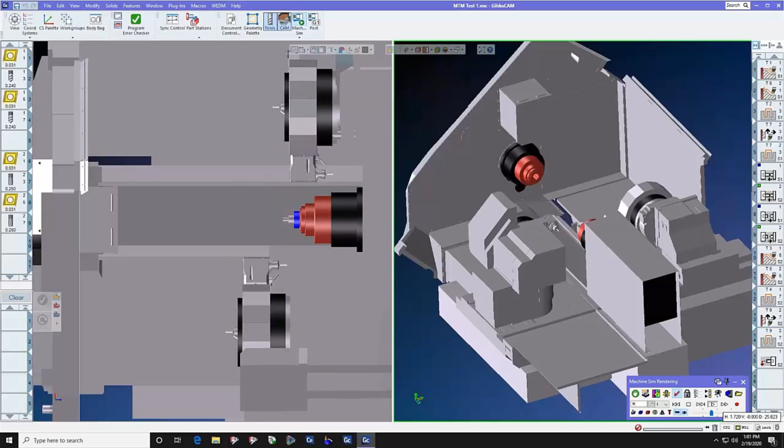Today we're going to be talking about GibbsCAM Multitask Machining, and this webinar is specifically designed to aid shops who are looking for software to program their MTM machines, multitask machines. In the next 30 minutes, we will answer common questions that you may have when starting into MTM, and we will show the ease in which GibbsCAM can set up, program, and even simulate your complete process.

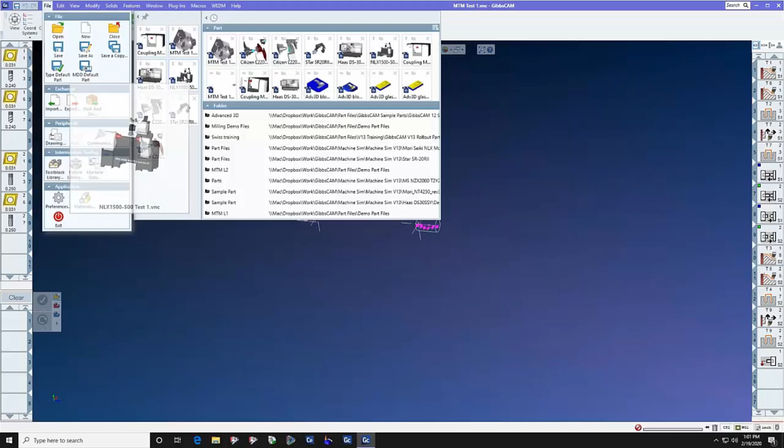As you can see here on the GibbsCAM screen, we have a multi-spindle, multi-turret MTM machine, but we're going to start a little bit further back than that, and we're going to start with MTM level 1. In this 30-minute session, we're going to be talking about the different levels of multitask machining. And here we're going to start with MTM level 1, which is a machine with 2 spindles and 1 turret.

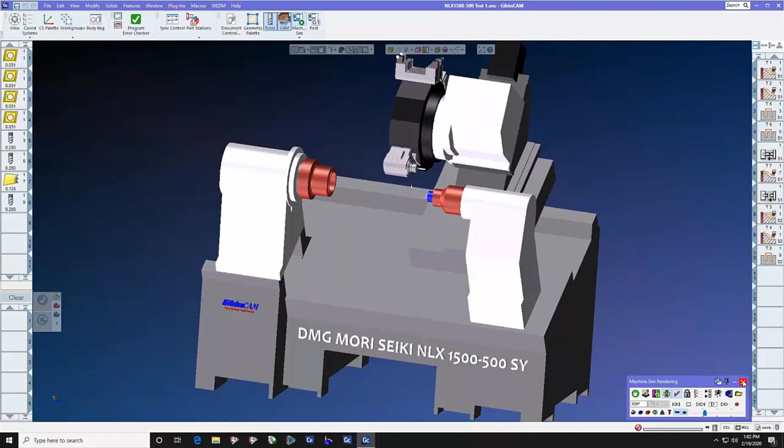Let's watch this part program run, and let's talk about questions that you might have as a GibbsCAM user looking to get into multitask machining. The first question that you might have in your head is, how easy will it be to program my new complex machines? As you can see here over on the right, we have an operations list that looks pretty standard for GibbsCAM. So let's get right into it, and let's first have a look at how we would create a toolpath on an MTM machine versus a standard turning machine.

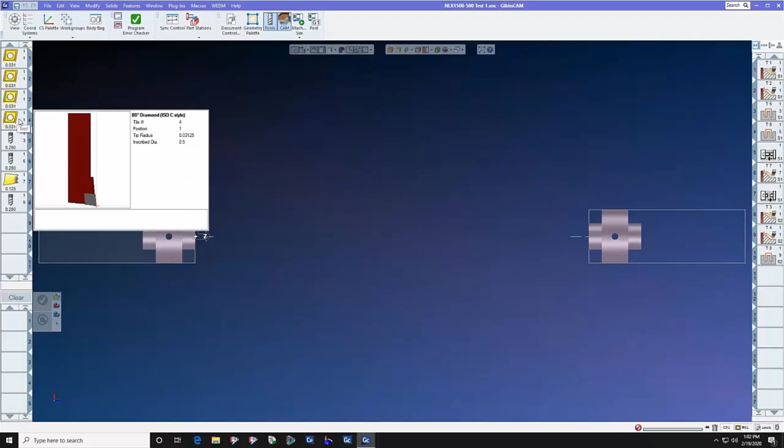On a standard turning machine, we have tools, a tool list, and we have operations over here, and it looks exactly the same in MTM. This tool faces the main spindle. This one also faces the main spindle. This one faces the sub-spindle. We have a front face drill, an OD drill, a parting tool, and a rear face drill. Let's look at how these tools may differ from your standard GibbsCAM to an MTM style machine.

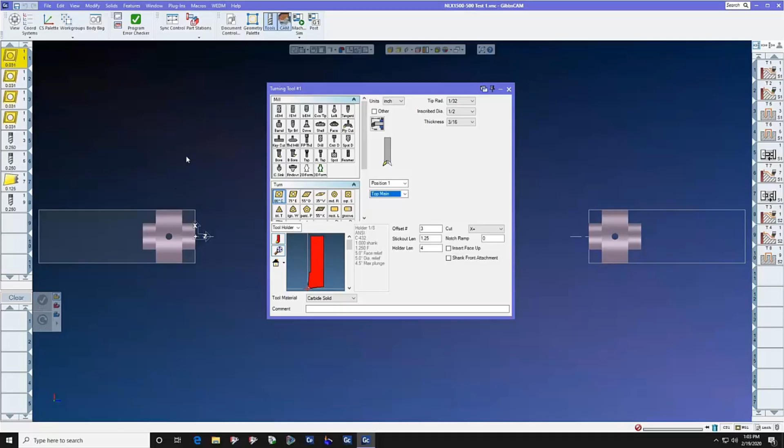The first thing you will note is that you have the ability to select the turret position, and if there is a second turret, we'll show in the next file how you can select the upper turret or the lower turret. You'll also see on the multi-quad tool holders, we get to select the position of the tool. And we also have a new button over here that says cut X plus or X minus, since the upper turret will cut on the plus side of X and the lower turret will cut on the minus side of X.

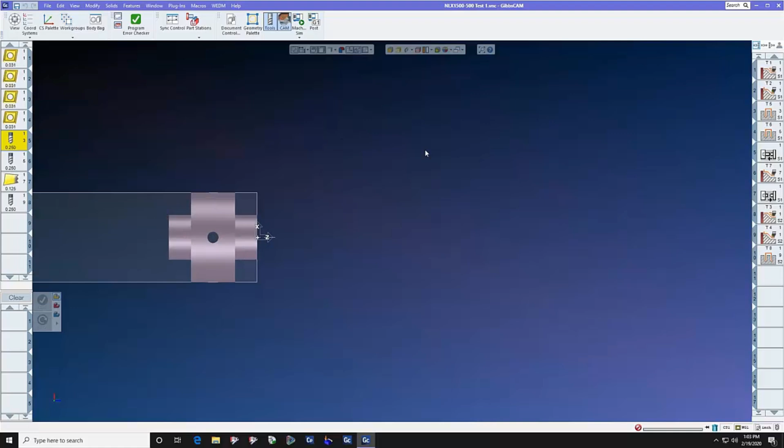Let's go look at the drilling tools for the front face. And yes, the orientation is pointed left. It's in turret position 3. Since this machine only has 1 turret, you can see there is no turret selection. So let's talk about how to put a tool path on a part, the mechanisms of GibbsCAM for those of you who may not be familiar.

We combine a tool with a process from the machining toolbox, in this case rough, and we set our roughing parameters. If you're familiar with GibbsCAM, you will notice that this menu looks almost identical except for 2 things. Here we have a part station selection where we can select the main spindle or the sub spindle. And then down here in the bottom of the window, we have to select the machining coordinate system.

So let's take just a moment and talk about machining coordinate systems. Your standard lathe would have a ZX plane, an XY plane, and a YZ plane, corresponding with the 3 planes that are required to run your MTM machine, G17, G18, and G19 plane. But on this machine, which has 2 spindles, automatically when you start up the file, you will get 6 coordinate systems: ZX plane subspindle, XY plane, and YZ plane subspindle. It's easy to remember about the coordinate systems in that ZX plane is for turning, XY plane is for front milling, and YZ plane is for OD milling.

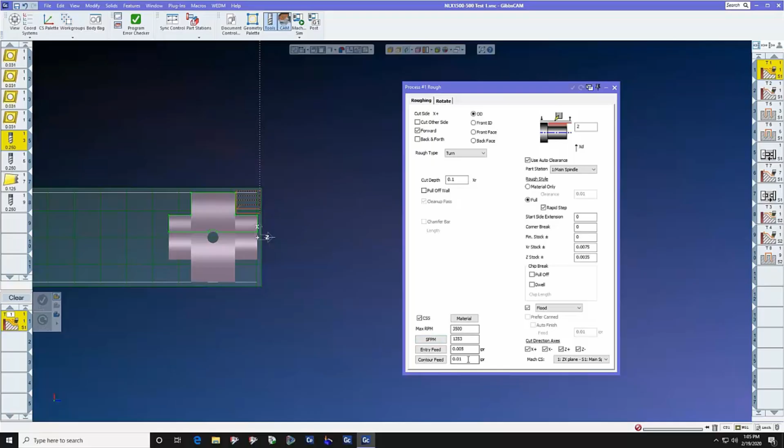So let's look at how to create a GibbsCAM process from scratch. We have the process window, OD, forward. We're not going to cut other side because this is an X plus side. Feed, speed, depth of cut, rough stock diameter, main spindle, stock, rapid step, and we would select the geometry using the profiler, because when you bring in a solid model into GibbsCAM, you do not have to extract geometry.

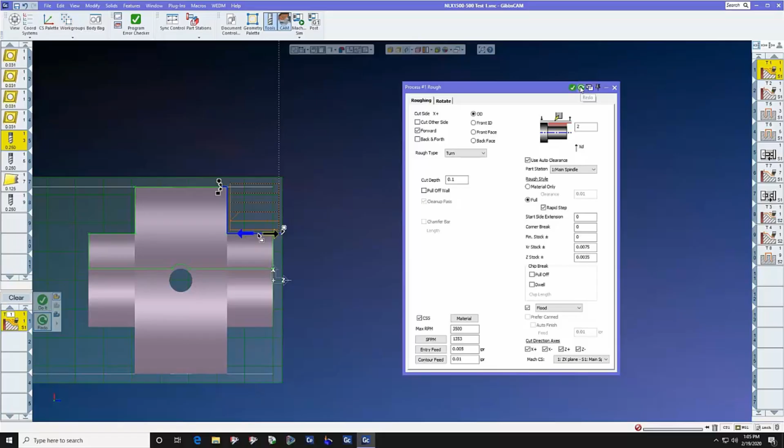Simply turn on the profiler, and we're going to point our machining markers at the surfaces that we want to cut, and we're going to press do it, and as you can see, we get a tool path. Now, we're not going to cover the contour tool path because we want to step right into the drilling tool path. And now, since we have an MTM machine and we're drilling on the XY plane because this is a live tool drill in a bolt circle, we're going to be on XY plane front spindle. Here on the process tab, on the holes process tab, we do select the XY plane front spindle.

And since this machine has limited y-axis reach, we're going to use polar and cylindrical milling so that Gibbs will rotate the part, and we only have to select one hole and duplicate it 3 times at 90 degrees. Go back to the drill tab, and part station is main spindle. We select one hole, press do it, and we have a tool path.

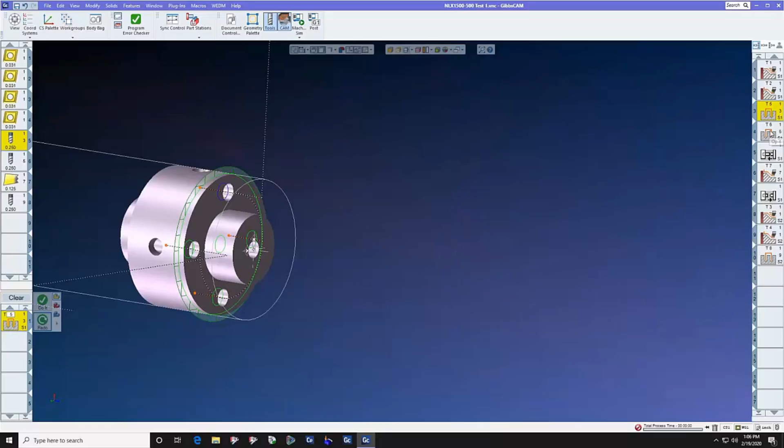The same thing for the next operation, operation 4, except it's on the YZ plane. Notice that when we double click a completed operation, the YZ plane automatically highlights, the profiler automatically opens up, and the geometry that was originally selected gets highlighted again. So let's have a quick look at this operation.

Rotate tab, YZ plane, duplicate 3 at 90, main spindle, and remember that when we are working on live tool in the YZ plane, we are working on the radius. This is a 2-inch diameter part. So here, this operation looks just like any other operation, but we want to cover one more thing before we go back to the simulation.

Something that's different about MTM is that we have control over the non-cutting aspects of your machine. And your big question right now is, how can I control the non-cutting aspects of my machine? A parts catcher, a bar feeder, a sub-spindle, or a steady or a follower rest.

When you receive a machine-ready package from GibbsCAM, in that package will be a VMM file called a virtual machine module. And what it does is it allows you to operate these utility ops. On your machine, you may have these utility ops or more or less. On this particular machine, look at all the utility ops that we have available here. So in this utility op, this is going to be a sub-spindle in.

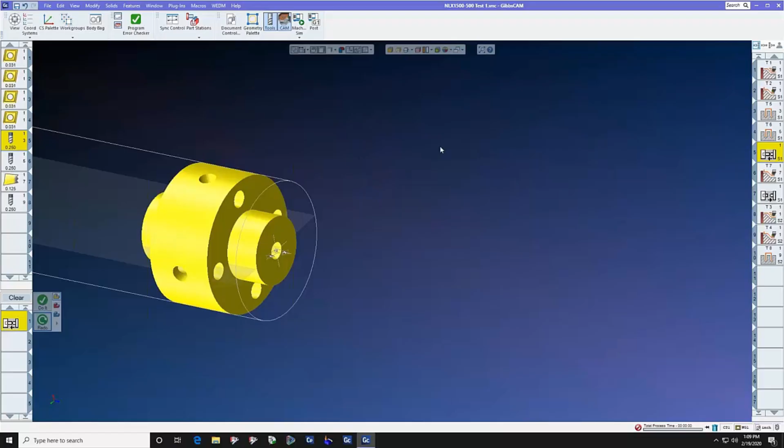Then we will do a part off operation, and then another utility op that allows the sub-spindle to return home. So again, utility operations are what allow us to control the non-cutting aspects of your machine.

Let's watch this part run one more time so that you can see all the things that we've covered, and you can also see that this quad tool holder is automatically commanded to move in the y-axis by GibbsCAM because GibbsCAM understands where each of those 4 tool tips are. As soon as the part file is done running, I will show you how we identify the tooltip position.

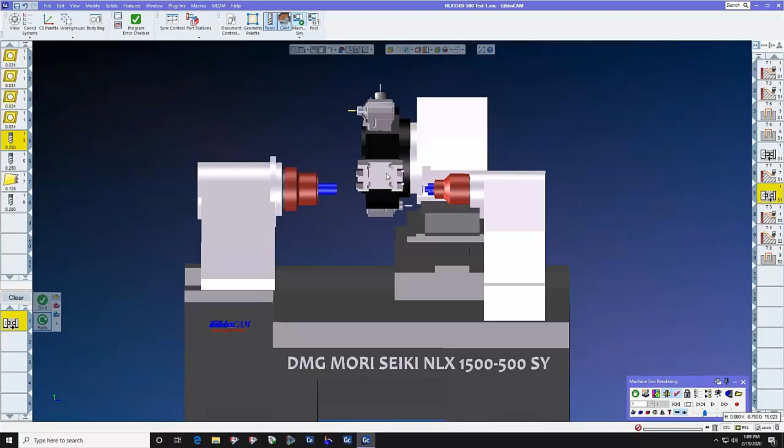And here, we're going to go back to rewind, and the top of the program, if we click on Tool 1 and force a redraw, Tool 1 is highlighted in yellow, and so on.

Let's add another utility op to this program very quickly, and we're going to do a parts catcher drop. So let's double click the utility op. We're going to parts catcher in, to the main spindle, do it. We're going to create another utility op, which is unload spindle to the parts catcher, main spindle, do it. And then finally, parts catcher return from the main spindle. And the spindle is unloaded.

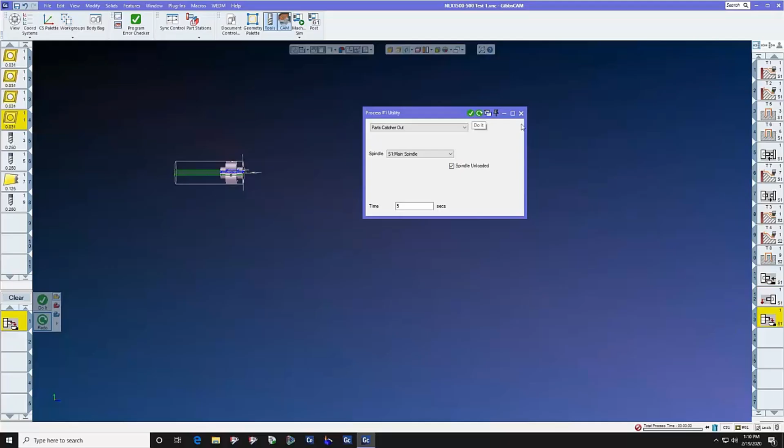So there we created utility ops. And now when we go back to the beginning of the program and rewind, you'll see that the parts catcher drop will happen and the part will be gone at the end of the program. So utility ops are very, very simple to work with. So this covers MTM level 1.

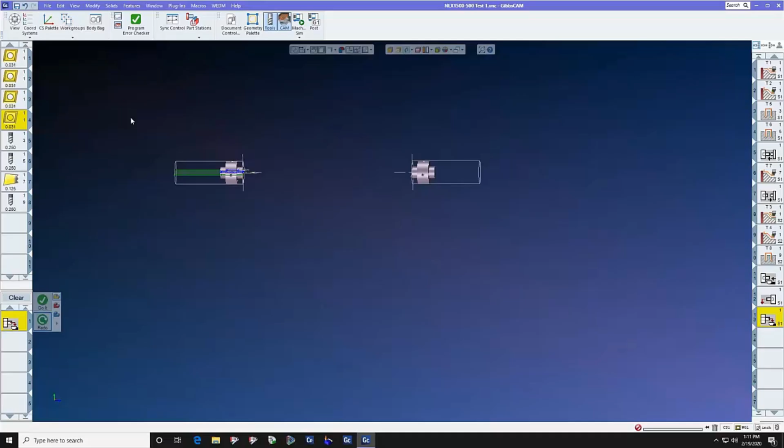Let's talk about MTM level 2. We're going to step to a dual flow machine, and we're going to talk about now the machine definition dialog and what a dual flow machine is. This is a two-flow machine or a dual flow machine. It's a Mori Seiki NZX 2000. It has 2 turrets and 2 spindles.

And we can control all of the synchronizations between the upper and the lower turrets to make sure they don't crash into each other. But let's have a look at the machine definition dialog. And the question that you have is, do I really need machine simulation to avoid crashes and shorten my setup and programming time? And we're going to answer that question in the next few frames.

We have here in this particular machine, the synchronization control. This is what allows us to synchronize the upper and lower turrets so that number 1, they work together, and number 2, they don't crash into each other. In this case, we have told op2, which is the second spindle, to wait until op1 is done.

The synchronization control is very simple to read and understand. If you look at the synchronization control, you'll see that flow 1 or turret 1 is on the left and flow 2 or turret 2 is on the right.

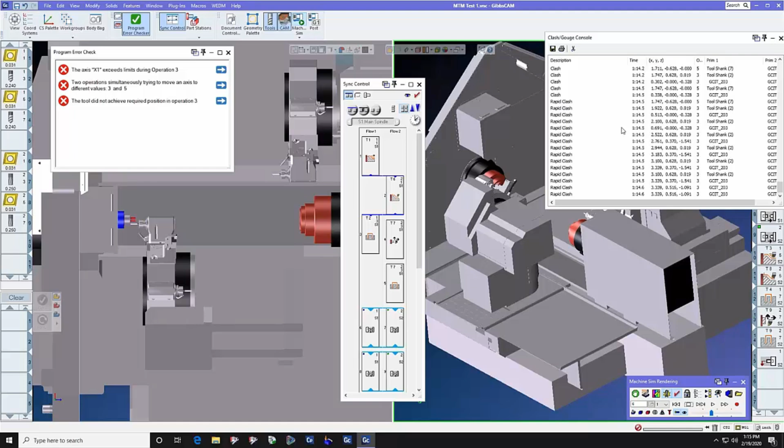Here comes the drill, and they're together, and now we have a crash situation, and the Clash Gouge console on the right actually told us what hit what at which operation and where to go to fix it. So what do we do? We go back to our synchronization manager, and we add the sync between ops 3 and 5. We go back and refresh the program error checker, and everybody's happy again.

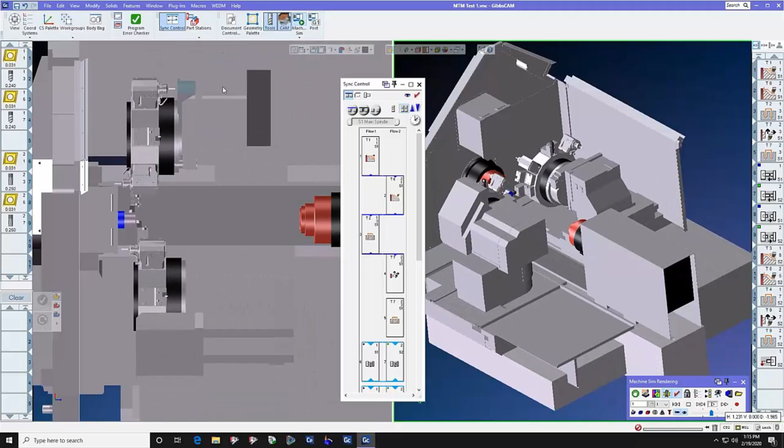We're going to run this through again, and while it's running through, we are going to talk about the machine definition dialog. Now that we've covered how to control a multi-spindle, multi-turret machine, we're going to talk about document control and the machine definition. Each machine has a definition file that sets up GibbsCAM's interface to work exactly for that machine. So you only see this machine's attachments, spindles, and turrets. Here we see a main spindle and a sub-spindle, and an upper turret and a lower turret. No additional information is required to program your machine.

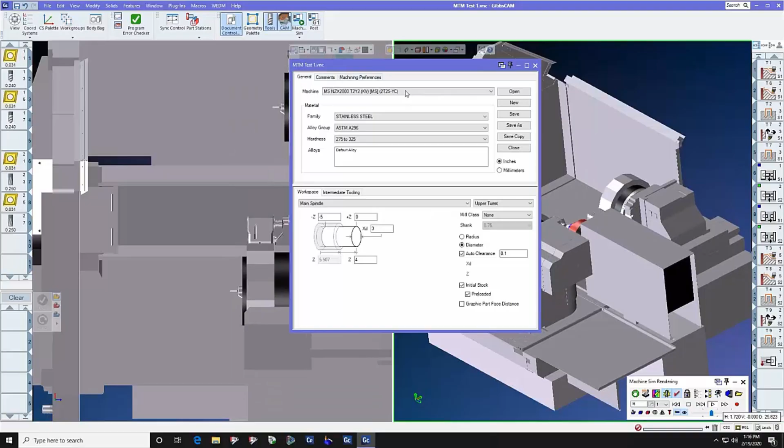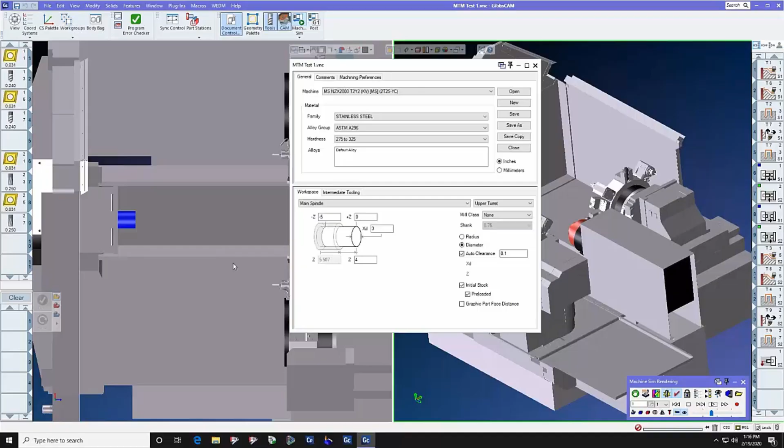So again, this machine definition dialog sets the interface up so that you are programming your machine exactly, and you don't have too much or too little information to look at. So let's look at main spindle and sub-spindle stock setup. Since you are familiar with 3-axis mill and 2-axis lathe, you're familiar with the stock setup: diameter, front face, rear face. But notice, since we are using intermediate tooling and the collet chuck, it tells us that the collet chuck's length is 5.507, and we told it that we want the part hanging out 4 inches from the front, and that the main spindle is initial stock and preloaded.

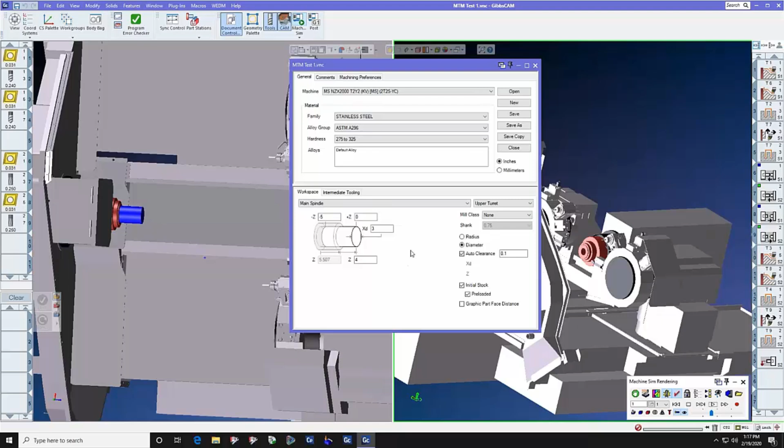Notice that each spindle has its own parameters. Let's go look at the sub-spindle parameters. It has no parameters because we said initial stock is not here. We're going to pass it off from the main spindle. The only thing we need to tell it is how far the part is going to be hanging out of the spindle after the pickoff, the pickoff that we demonstrated in the first part file. So we're done with the pickoff, and we have the part in the sub-spindle, and now the stock is in the sub-spindle, as you can see at the end of the program. So again, the machine definition sets up GibbsCAM for your exact machine.

And let's go to another machine tool that is another MTM single flow. But again, we want to look at this particular machine and how it works. And we want to go back and look at the MDD and see how it differs for this type of machine. This is a single turret, twin spindle machine. And in this file, we want to look at the MDD very quickly. It has a main spindle and a sub-spindle, but only one turret.

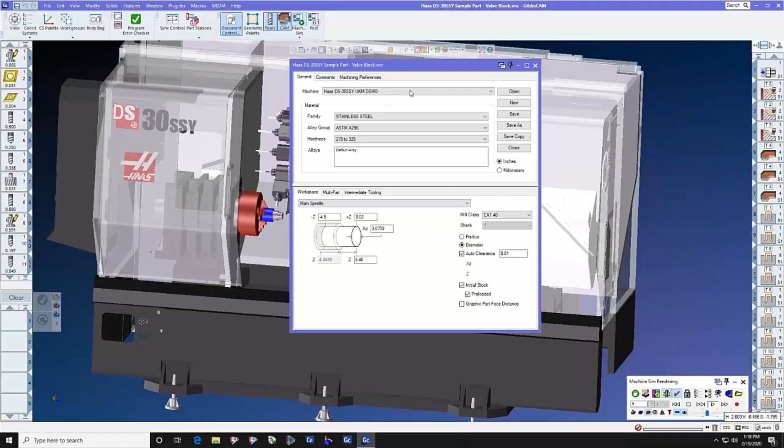We've talked about the main spindle and sub-spindle setup, but let's talk, just for a moment, about intermediate tooling. Your chucks and tool holders become a part of your machine simulation. And machine simulation requires very little effort on your part to set up and to show everything running correctly on the part.

For instance, when we want to select a chuck, we simply go to the intermediate tooling tab, go to fixture, and select our chuck from a list of chucks that are available for the main spindle and a list of chucks that are available for the sub-spindle. And in this case, the chuck is actually interactive with the diameter of the stock that we typed in here. You change the diameter of the stock, it changes the grab diameter of the spindle.

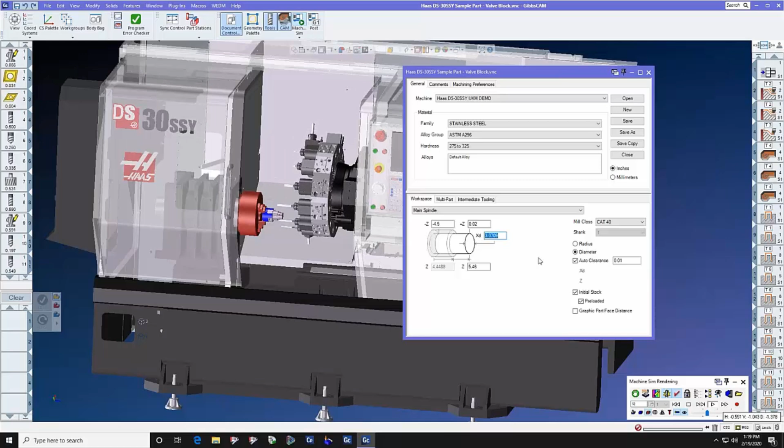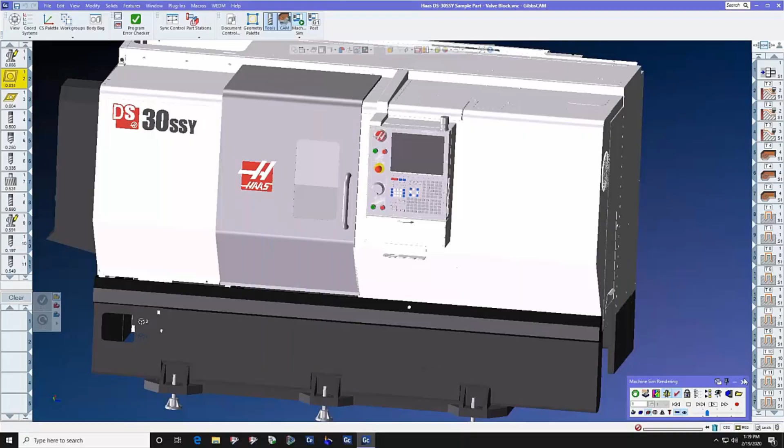Let's go and look at intermediate tooling from a tooling side, and we have this tool. It has an intermediate tool, again, that comes from the intermediate tooling list on the tool attach page, and you get to select your tool holder from a list of tools that are available. Again, it's very fast, it's very effortless, and it doesn't require much time on your part at all.

So we looked at the MDD, we looked at the speed of the setup, and the time savings of programming and simulating offline. The fact that your machine is not tied up out on the floor while you single block through a program, GibbsCAM gives you the confidence that you need to be able to post a program and send it right out to the floor.

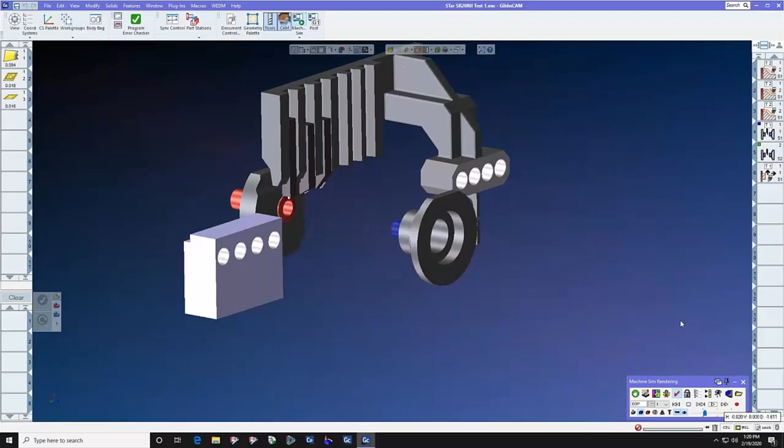We're going to start talking about MTM level 3 now, and we're going to step up to a very simple star machine. And the question that you have right now is, what if I have a machine that is non-standard? And by the way, MTM machines have not been standardized. There's no such thing as a standard MTM machine, and GibbsCAM has the flexibility to be able to work with all types of machines, no matter how many flows. Here we have a 2-flow Swiss machine, and we just wanted to show you how it operates.

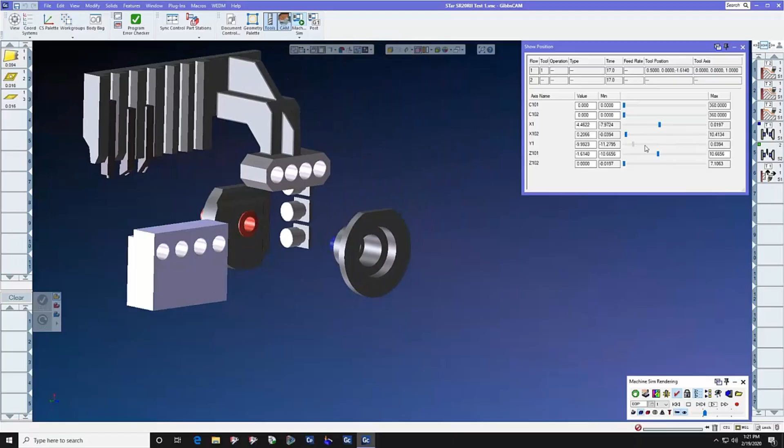But another interesting tip that we want to show you is when you are setting up a complex machine like this, we have this little indicator called the show position indicator. The show position indicator lets us test our setup and our tools and our axes to make sure that we have everything set up like we need it. All the tools can reach the part and all the parts can reach the individual spindles.

Again, saving a tremendous amount of your setup time in the day so that you don't have to do this out on the floor. And you can actually send a picture out to the floor to the setup man so he'll know exactly where to put the tools into the machine.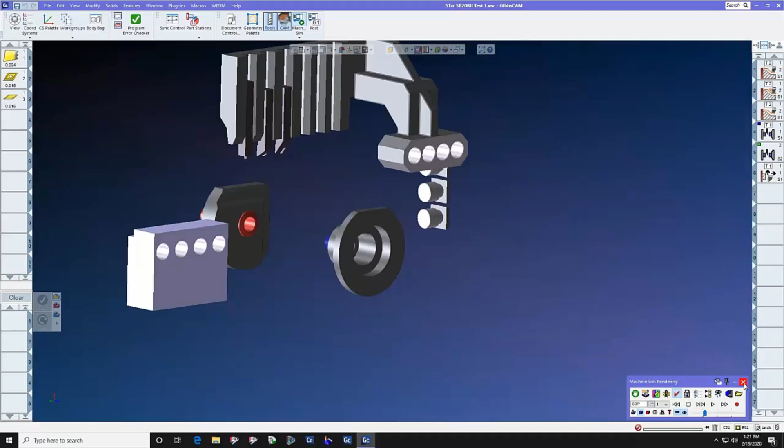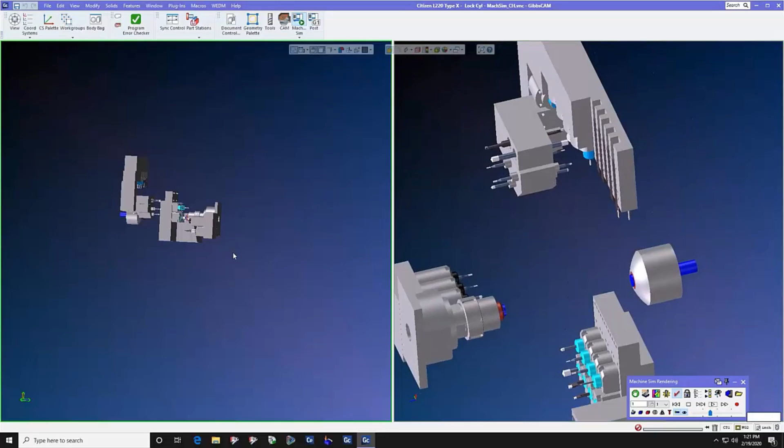Let's step it up a little bit and let's go to a more complex multi-flow Swiss style machine. And this is a Citizen L220. And we're going to look at this in our dual window so that we can zoom in on certain parts of the program so that we can simulate it quickly, check for errors, and look at it at any angle that we want. Let's zoom in on the main spindle on this one. And here, let's zoom in on the sub spindle so we can see everything that's going on there. This is a multi-flow machine.

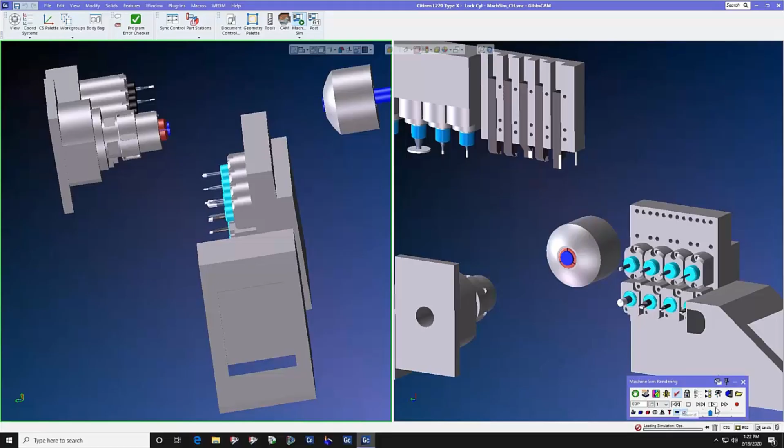And your question is, is GibbsCAM flexible enough to cover all of my MTM types? And the answer is yes. GibbsCAM can cover single flow machines, 2-flow machines, 3-flow machines. As a matter of fact, we can handle up to unlimited spindles and unlimited axes. So we have the ability to build a special machine just for you.

And here in the Swiss, we use the same methods that we used in the other machines, except Swiss has a unique benefit in that when we go to the sync manager, you'll notice that inside of the sync manager, we have light blue system syncs. Light blue system syncs are automatically generated by GibbsCAM when we are operating a Swiss multitask machine. And as you can see, the Swiss machine, even though this is a very complex part, required no operator generated synchronization because all of it was done automatically with system syncs without a crash on this machine.

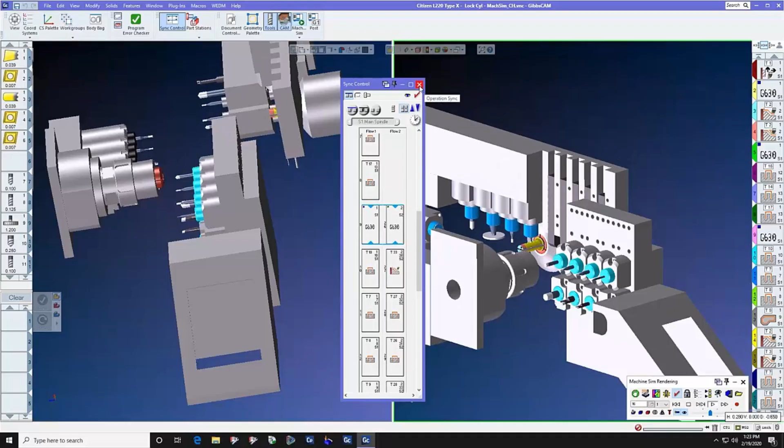So while we're here, we're going to talk about Swiss machines and how they differ from other machines. Because they are multi-flow machines, they are multimodal and they have different machine modes. As you can see here, we have G630 mode. And let's go down the list and we might see some other modes. But let's open up one of the operations that has a utility op in it, and let's see what modes are available in this particular Citizen style machine.

It has pattern cancel, single machining, ID-OD simultaneous machining, parallel machining, front and back simultaneous machining, and rear machining only. So each Swiss machine, again, has its own utility ops that allow us to do special things with Swiss machines. Another benefit of Swiss machines is that we have this new cutoff part transfer op, which is a single operation that does everything for us.

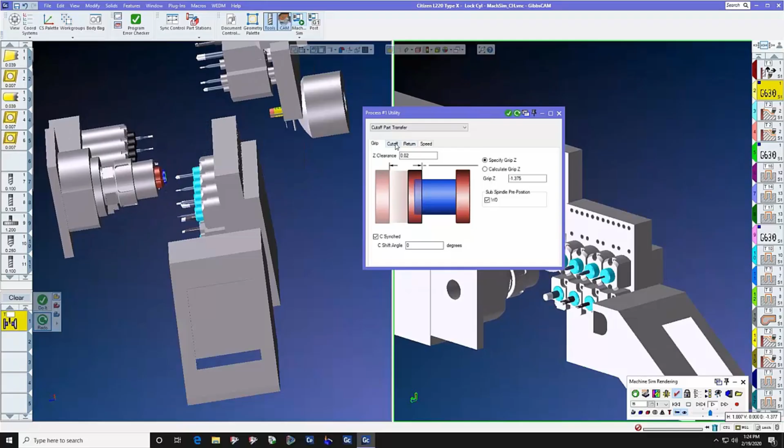It does the sub spindle in, it does the cutoff, we tell it where the cutoff Z is, the return, and the speeds and feeds at which we return. And that is a cutoff part transfer. Automatically, when we do a cutoff part transfer, you will see that the appropriate axes physically get out of the way so that the sub spindle can come in, the parting tool can do its job, and nobody has any collisions. Again, this is a function of MTM level 3.

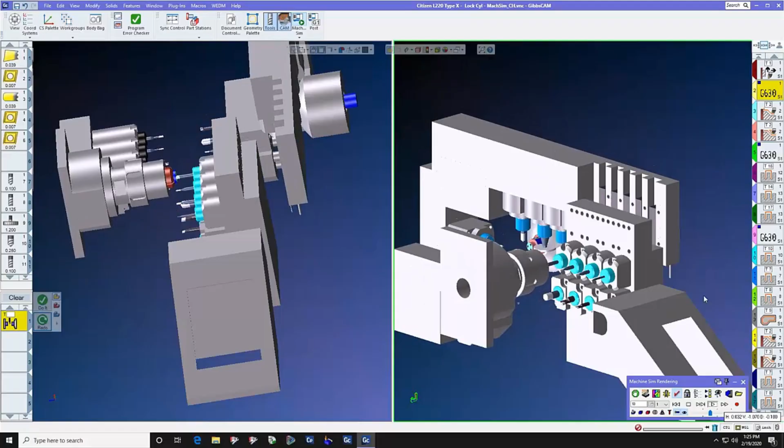So MTM level 1 was a single flow machine. MTM level 2 was a dual flow machine. And MTM level 3 could be 3 or more flows, and they're not treated any differently. So if you can program a 2-flow machine, you can program a 5-flow machine.

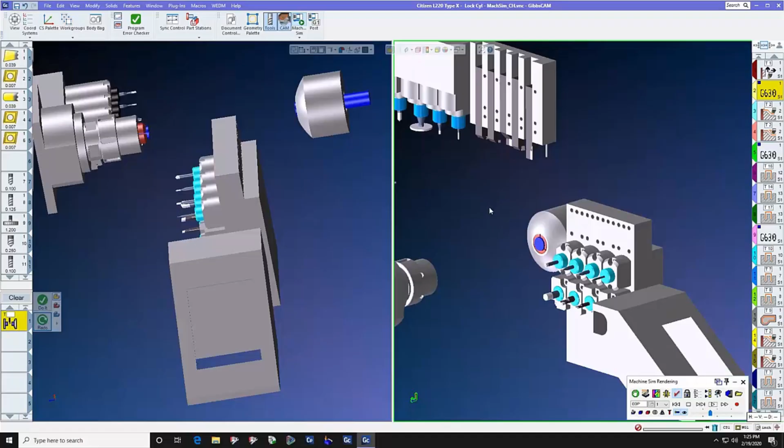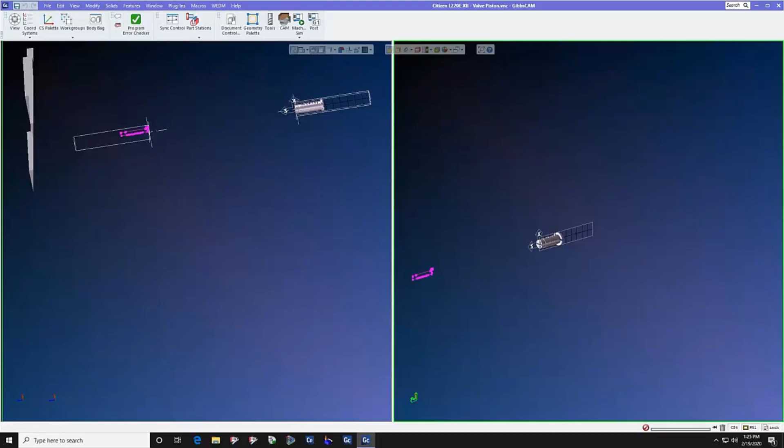The Swiss machines also come in many different flavors. There are Swiss chuckers, and Swiss machines are now approaching another stage in which they have decided to go back to turrets on certain types of machines. The ECAS machines had a turret, and now Tsugami has a third generation of machines that have a turret on it, where this is a gang style machine with a B-axis.

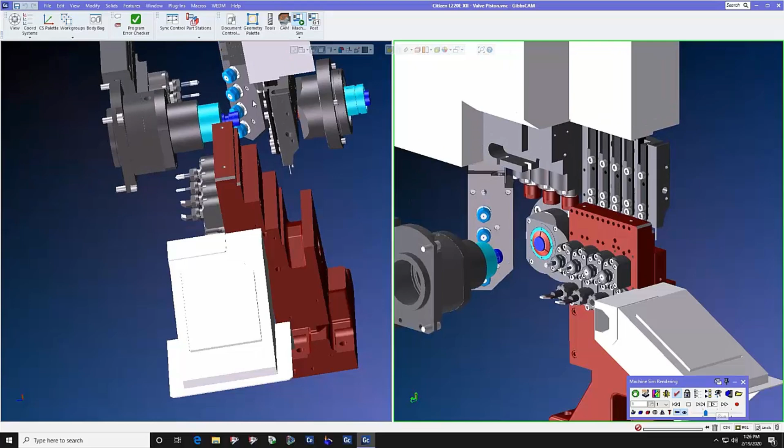So here's another thing. We have taken the gang tools and we have now added a B-axis to this particular machine. Let me rewind it and slow it down a little bit at the front of the program so that you can see the B-axis turn. So this is another type of Swiss machine altogether, a B-axis Swiss machine.

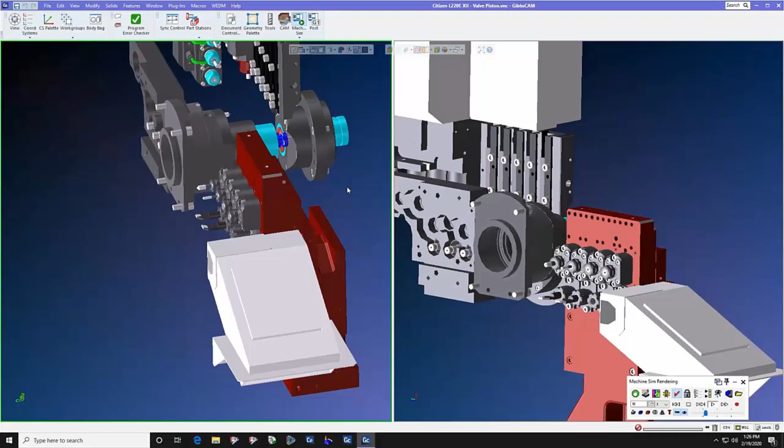We hope that you have gotten enough information to be able to make a reasonable guess as to what type of CNC machine you will need and what type of GibbsCAM programming software you will need to work on your parts. We would like to now open the floor to questions, and Mr. Bart Ellers is going to help us with those questions. But before we go, GibbsCAM is efficient, safe, fast, accurate, and flexible, and these machines are complex, but GibbsCAM offers a simple solution for all of your MTM needs.

Mr. Bart Ellers, do you have any questions from the floor? Hey, Patrick. Great job with the presentation. We do have a few questions. The first one is, are solids required for MTM? The question is, are solids required for MTM?

Solids are not required for MTM, but they are highly recommended because, as we demonstrated in this webinar, there's a lot more going on than just the interactions between the tool and the part. Here in this Swiss machine, you can see that we have tool holders, spindles, collet nuts, nuts and bolts and screws and parts catchers, and those are the kind of things that we need to show solids. And again, GibbsCAM will deliver to you a machine-ready package, and all you do is plug in your tool paths and your tools, and you're ready to go.

I would add to that by having solids, it does significantly reduce your programming time. Solids just helps make programming faster. And overall, solids just gives you a better programming experience than trying to visualize something which is 2D geometry.

Another question we have is, what is the difference between the VMM and the MDD? All right, let's talk about the MDD. When you get a machine sim package, what's going to come in that machine-ready package? And by the way, the package is a self-installer. You simply drag and drop it onto your GibbsCAM interface. And if you go to our YouTube channel, you will see a tech tip on how to install a post package to your computer. So the first thing that you will get is a custom MDD.

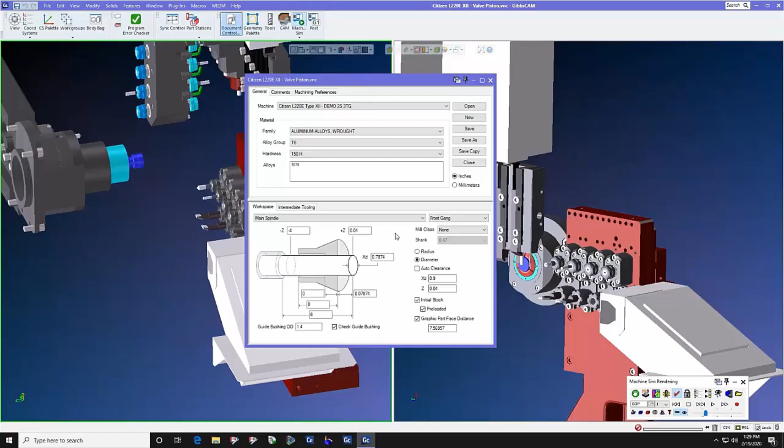And while we're here, let's have a look at the Swiss MDD. It has a guide bushing instead of a chuck. Not only does it have a guide bushing, but it has a checkbox here that we can check the guide bushing if we accidentally drag the part backwards out of the guide bushing, because it may catch when we're dragging it through. So the first thing that comes in your machine package is your machine definition document. It sets up your interface and it controls the behavior of the machine.

Now let's talk about the VMM. If we right-click here in the process list and we click Change Process and go to the machining toolbox, you will see in the utility area a button that says VMM, which stands for Virtual Machine Module. The Virtual Machine Module is one of the things that sets GibbsCAM apart from our competitors and allows us to control the non-cutting aspects of your machine. In this case, not only just parts catchers and bar feeders, but machine modes and parking areas, moving tool groups from one spindle to another.

We can do multiple part shifts. You have a part that's 3 feet long and we want to turn it in 2-inch sections. We can pull it out 2 inches at a time and turn it using the part shift inside of the VMM. And each VMM is specific to your machine type, whether you have 1, 2, 3, 4 turrets. You may even have 2 parts catchers. You may even have a double bar feeder if you have an MC420 Plus.

So does that answer your question? And did you have anything else that you would like to add about what comes in a machine package? Oh yes, a post processor and the machine sim model also come in the package.

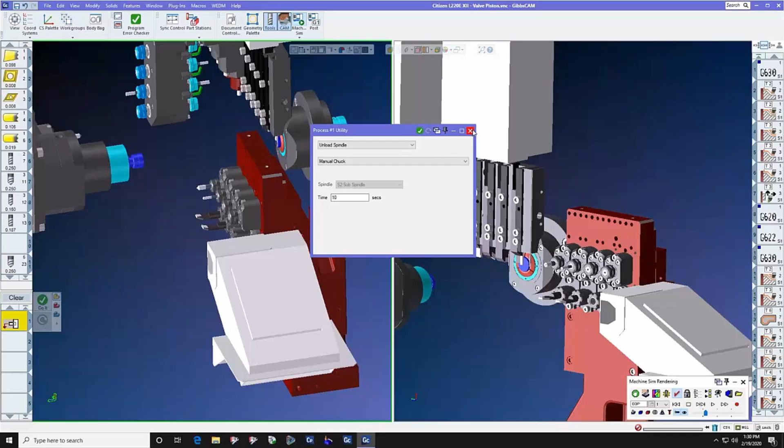I think you covered that well. Like you said, the machine, we're going to send them a package, and in that package, it'll be a machine-ready package. I mean, drag it and drop it. It's going to self-install the post, the MDD, the VMM, and even a sample part for them.

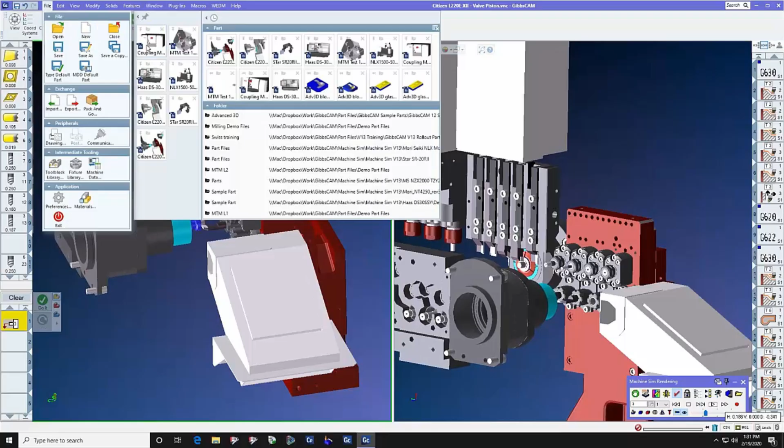But the VMM is very critical, and it's part of what differentiates GibbsCAM from other CAM packages in our ability to graphically control the non-cutting motion of a machine. This becomes very important in these MTM machines, where, as you already said, there's a lot of motion going on in these machines besides just the tool that's cutting on the part.

A couple more questions, and then we'll go from there. One person wants to know, are we able to download the 3D tooling, nuts, collets, etc. from Gibbs for our machine? So basically, they're asking about how do they build a machine sim model and where do they get the components?

Machine simulation, once you purchase the machine simulation option, you have 2 ways of getting a machine simulation model. Number 1, you can purchase it from us. We will build it for you. We will set up the MDD, the VMM, and the post processor to match your machine simulation model. Or number 2, yes, GibbsCAM is fully self-contained when it comes to machine simulation.

You may draw your own machine inside of GibbsCAM, and you may follow the machine simulation manual included in all GibbsCAM installations, and you may build and animate your own machine sim model inside of GibbsCAM. You may need some help, though, with the non-cutting aspects of your machine sim if you want to control a parts catcher, a bar feeder, a steady rest, or a follower rest.

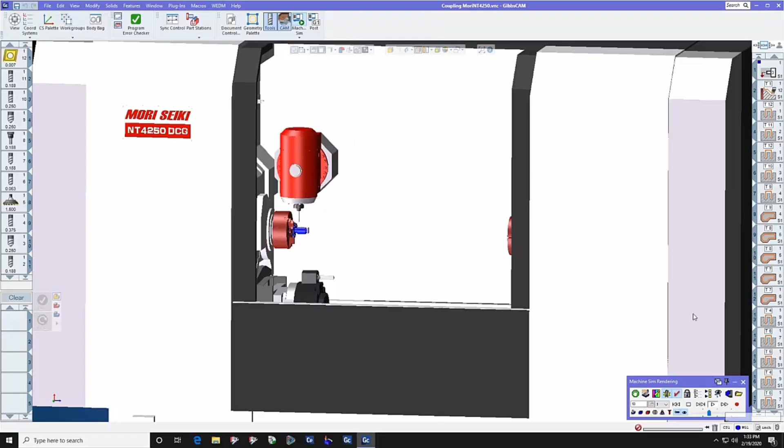And by the way, we have another part file running because we wanted to show you how MTM has evolved. And as you can see, turret machines are not going away, but we're starting to see less and less turret style machines and more machines like this DCG from DMG Mori Seiki, where it's no longer an upper and a lower turret slant bed machine, because we found that the flexibility simply wasn't there.

So they basically welded a milling machine together with a lathe, and now we have large amounts of Y-axis, and we have a built-in B-axis, C-axis, and sometimes an A-axis. So yes, machine sim is an integral part of GibbsCAM, and you may build your own machine sim model and animate it. So I would just add to that, you're absolutely right.

You boil it down to there's 2 ways. Once you have the machine simulation software, the option to actually do simulation, it's a matter of getting the model, and there's 2 ways to get the model. You can have us do it for you, in which we work with the machine tool builders to get these models, and we turn them into the dynamic model, or you can do it yourself in

Bart, your audio just dropped out. Are you still there? Can you hear me? Yep, got you now.

Okay, thanks. But as far as getting individual components for these machine sim models, like the nuts and the collets and stuff like that, generally Gibbs doesn't have a library of those, but generally speaking, your vendors, your suppliers have 3D models that you can get from them.

All right, one last question. Can MTM support more than 3 flows? Yes, GibbsCAM multitask machining can support more than 2 or 3 flows. The GibbsCAM framework allows us to set up as many axes, linear and rotary axes, as possible. I'm sorry I don't have the one up on the screen, but I can't show it because we developed it

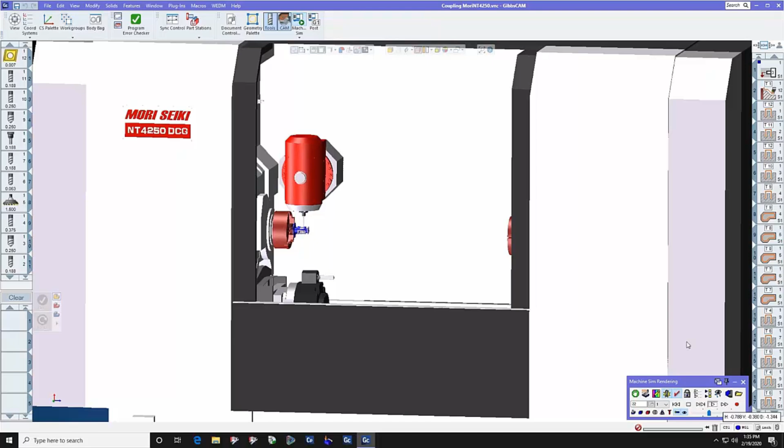If you're familiar with Willemin-Macodel, they will build a CNC machine to whatever specification that you want. And then once we at GibbsCAM see that, we can build one that will match that machine's. This is what we call kinematics, the movements of the machine, the axes, the locations, and what they can do.